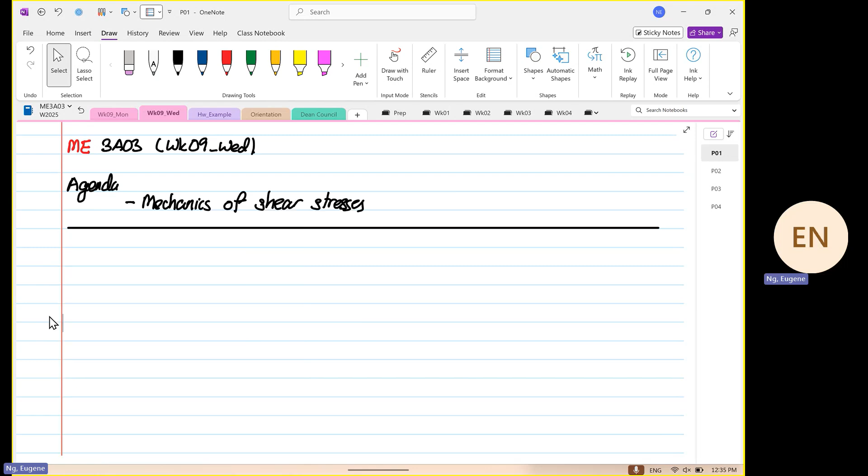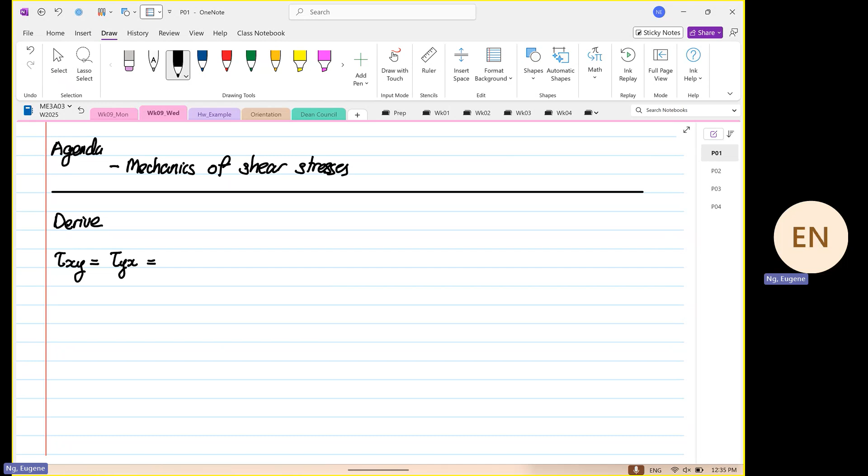So today, it's not just applying a formula. We are going to derive that shear xy is equal to shear yx, and this will be equal to 3 over 2, and then we will have Vy over A, and then we have a form that we have 1 minus y squared over c squared. Okay. So we are going to derive this formula.

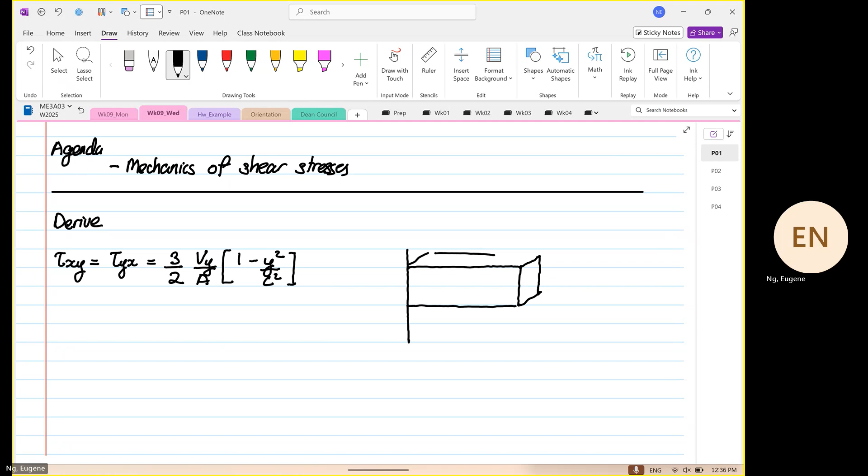And from here, what we do now is, what does the structure look like? Or how can the structure look like? So if the structure now is a built-in structure, so you have a built-in structure over here. Yeah, my drawing's a bit crappy today. And this built-in structure has a load P over here. And then we have our transformation. This is X, this is Y, and this is Z. Okay.

So from here, we know when we have a cantilever beam, at this surface over here, this is where fracture will occur. Okay, if it's going to break, it's going to break at a plane. So the fracture plane, if I'm going to look at the fracture plane now in 3D, all right, this is the plane of interest. So this is X, Y, and coming out is our Z.

So now this plane intersects this plane over here, this line. So it's our X. And the shear force, P, this is equal to Vy. Okay, so we know that the shear stress is coming down in this direction. Okay, so where is this direction? So we know that the intersecting plane is X, the shear force, the shear stress is coming in the Y direction. Okay.

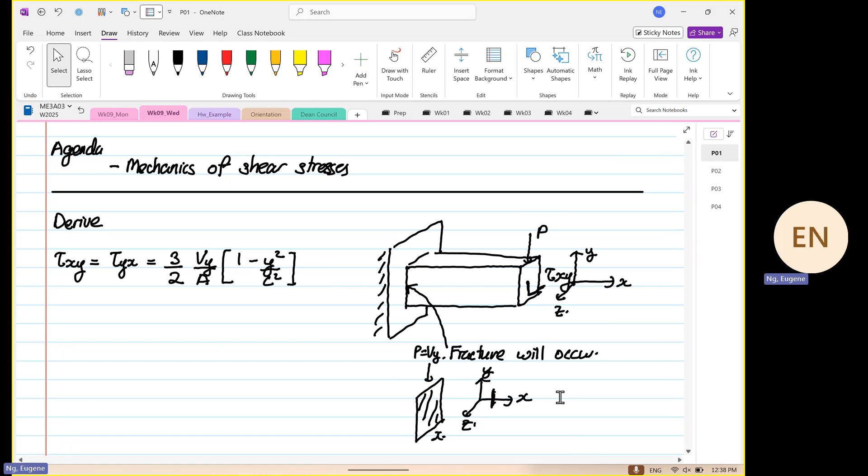So I'd like to draw your attention to this diagram over here, which you all have. Can you copy and paste this diagram on your notes? We are going to rely on this diagram heavily now. I repeat again, we are going to rely on this diagram heavily now. Now, up to today, when I see a diagram like that, I still take it like whatever.

Okay. Did I tell you about my sister yet? Have you heard about my sister? My sister, her name is Eileen, and I'm Eugene. Okay? She's 2 years older than me. One of the best teachers in Singapore. Unlike me.

When we were young, the grades was the top 2%, like most of you. You want to know how I did in my elementary school and high school? Bottom 2%. Okay? So whenever there's a parent-teacher's day, my parents volunteer, cannot wait to go to meet the teacher. When it's mine, no one wants to attend. It's like I'm an orphan. Okay? But my mom, they go to my dad, and my dad, they go next year.

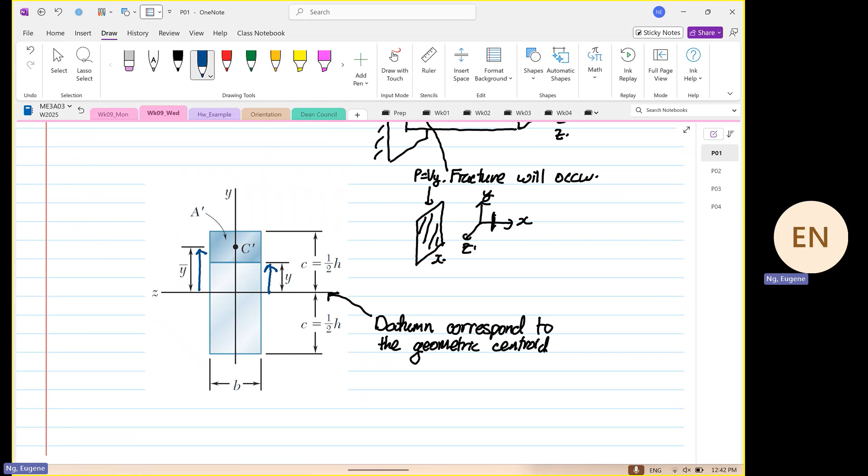So the first thing that I like to highlight for you, okay, so if you were to tell me, Eugene, how will you change this diagram? If I were to change this diagram, I'll draw the arrow going this way. Right? And you all did engineering drawing before, yes or no? When did you do your engineering drawing? Could you remember? Last year, right? In 1P whatever, right? The one course that got 13 units and whatever. Okay.

And this is the sign for, I'll not call any name, this is the sign for datum. Okay. So we know that that is our geometric datum. Okay. And then the shaded region is A, is the area of interest or area of concern. So you are interested in that area. Okay.

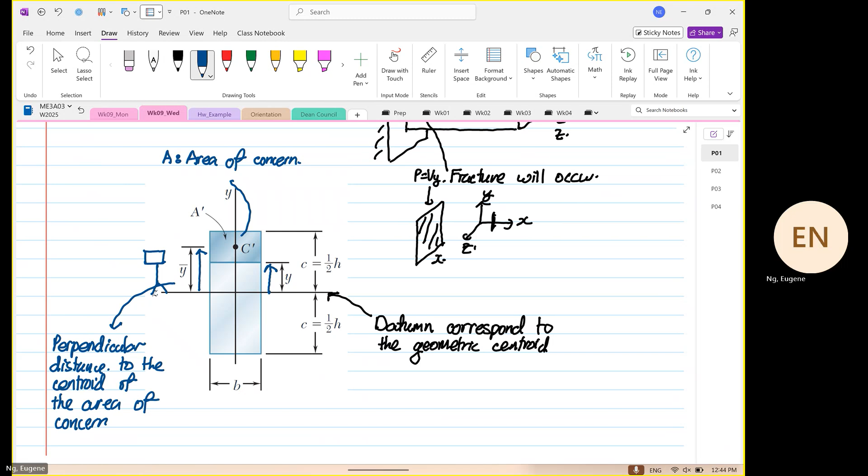Now, Y over here, or Y bar over here, is the perpendicular distance to the centroid of the area of concern. Okay. So you can see over there, right? C prime, this point over here, is the centroid of the area of concern. Okay.

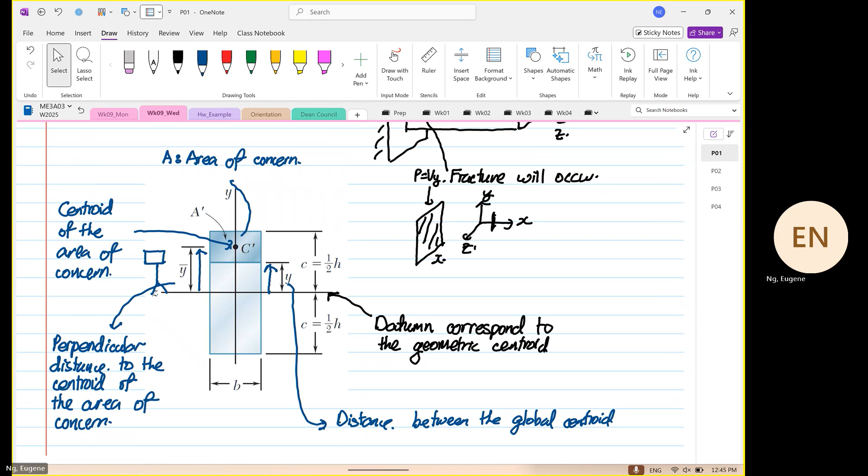So Y over here, you will see another symbol. So y over here, right? The small y is the distance between the global centroid to the area of concern.

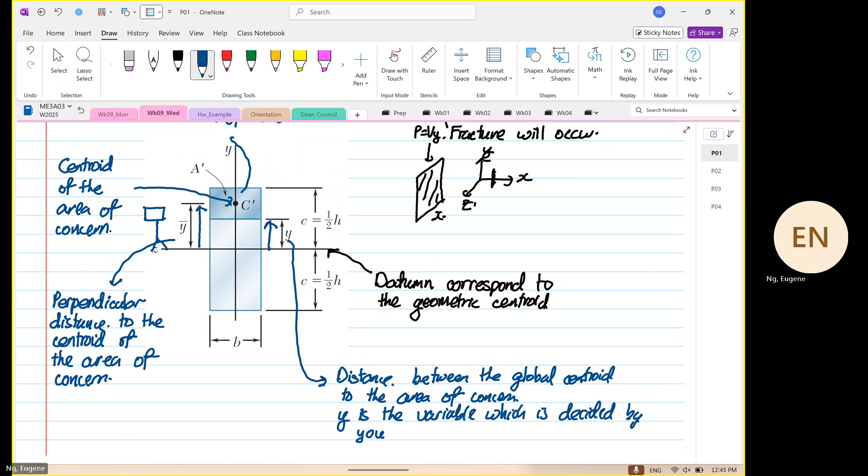Okay. So y over here is your variable. So you decide. So y is the what? Variable, which is decided by you. Okay. You decide what you want it to be. Okay. Now, after you have seen all this, we are going to write out the general formula. Okay. So the general formula is shear xy is equal to Vy over Izz, Qz over T. Okay.

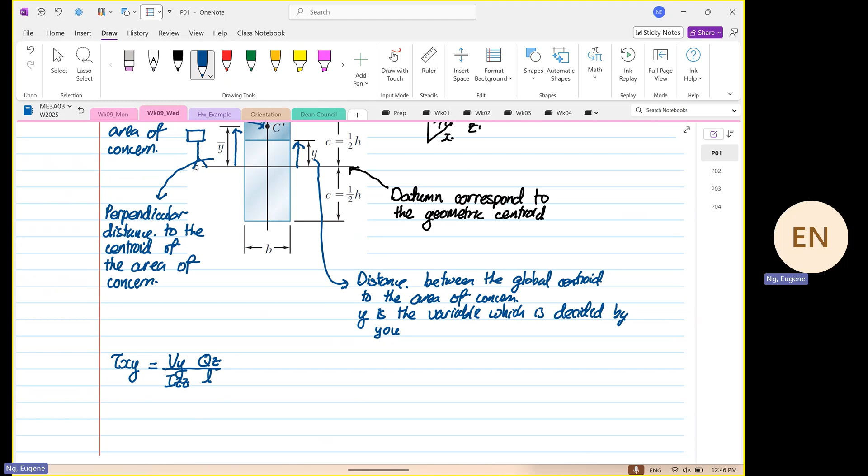So now, rule number one. Okay, we are going to write, wait, let me see, is it rule number one? I've written so many rules. Okay, rule number one. Now, there are 7 rules. You cannot break any one of them. Clear. But if you do break some, you still go to heaven. Clear. Okay. So you cannot break any of them. Okay, but you can still go to heaven. Okay, so rule number one.

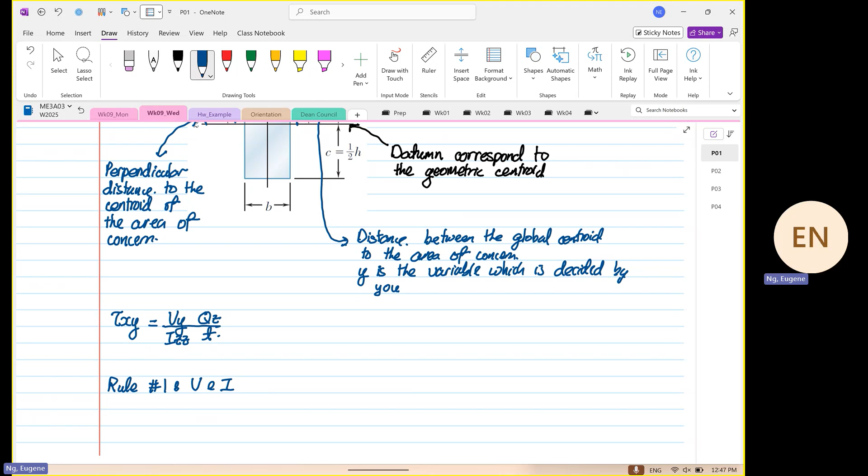Okay. It's important to note that Vy and Izz, okay, or I won't call it Vy, it's important to write V and I, okay, it's like my girlfriend V, but anyway, V and I are constant regardless of